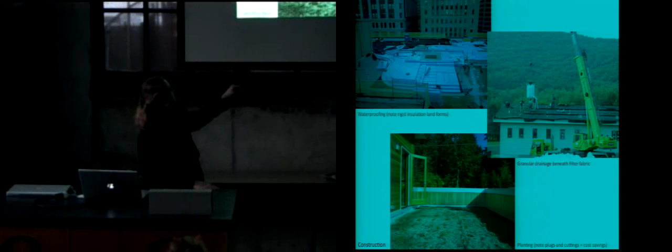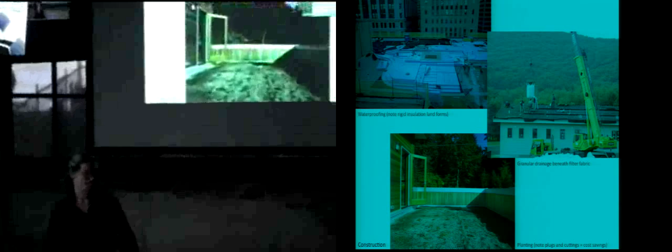So as you construct it, it's pretty standard construction method with the exception of that middle zone where they've got the big bag hoisted up and they're carefully, slowly spreading dirt over the roof of the Sugarloaf Wellness Center. They also have blower trucks, which they take the hose up to the roof and sort of spew this stuff around and you rake it into place. What you don't want to do is dump 3 cubic yards of dirt in one spot on a roof, because again, your structural engineer is not going to be excited.

Note the waterproofing layer, what should be orange, but is actually black. That should be bright orange Sarnafil waterproofing. But note on top of it the classic bright blue Dow styrofoam layers. Basically what they were trying to do there, and that's the Chicago City Hall green roof, they wanted to create topography on the roof. But they didn't need deep soil profiles. They didn't want to grow trees.

So the way you make topography on a green roof is through layers of styrofoam stacked up like that, and then you put 2 to 4 inches of growth medium over them. So you can get landforms on a green roof, but the way to do it isn't to pile dirt, it's to stack lightweight material underneath.

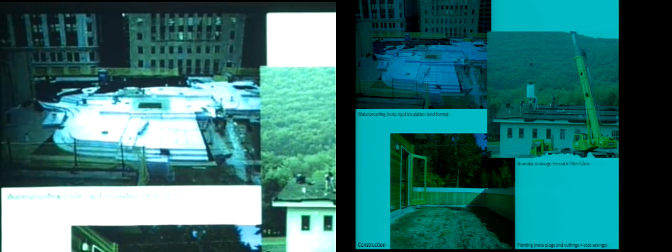So you do your waterproofing, your landforms if you want them, your drainage layer, dump the soil medium, and then we're bringing the plants. Typical intensive green roof, it's going to be shrubs, trees, grasses in gallon pots, kind of standard landscape installation plants. I always want to do it backwards. Extensive green roofs: if you're doing sedums, you can do plugs. I'll show you an image of those in a minute.

Actually, if I go back, that's Ed Snodgrass at the top of his farm in Maryland. He's written a book called Green Roof Plants. You can buy plugs, which is what he's tending there, and plant those by hand. Or they actually get a bunch of cuttings and you huck them out on the roof. And they're like the cockroaches of the plant world. 2 weeks later, they've made roots and they've perked up and they're quite happy.

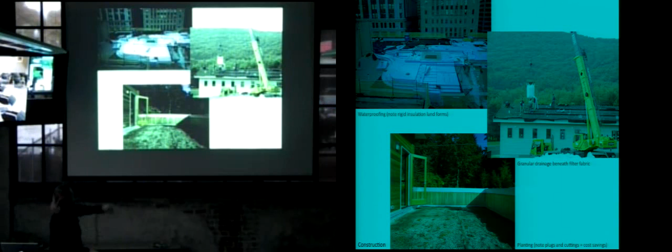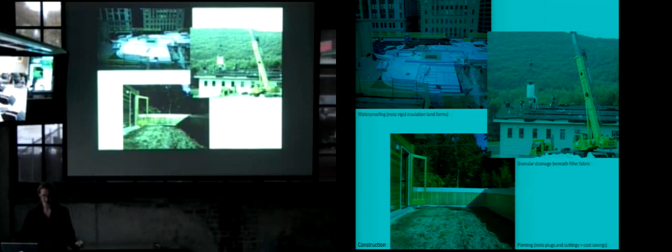And so this roof, you can barely see it in this projection, I apologize for the quality, but there's a grid of plugs which are going to give you a little more fill more quickly, but then the whole roof has been broadcast with tiny little cuttings, and in about 2 weeks they sort of perk up and get happy.

So that's the sort of quick and dirty, and I've attended 3-day seminars on getting to that point. So you got the really quick and dirty version of what goes into a green roof, how they get put together. Why would you do them?

It was great. I was working on my own house, and our bank said, we need a memo about the green roof. I said, yeah, sure, what do you want to know? And they said, well, what do you have to plant there? How heavy is the soil? Why do you want to do this? What's the point of a green roof? I was like, whoa, you just went from technical to ethical. Where are we going here?

And I thought, if I were putting a slate roof on my house, the bank wouldn't be calling me up saying, I need a memo telling you why you're doing this. So a lot of times you're asked, why are you doing this? You're doing it for a lot of reasons, and most of them have direct tie-in to money, which is what the bank wants to hear.

So improved roof life, because the roof has been protected from UV degradation, and you minimize thermal expansion and contraction, so the material holds up. In Germany, they found 3 times the expected life of the roof, or they've hit 3 times and they're still going. So they found really good life performance of especially EPDM and PVC roofs when they get protected with a green roof.

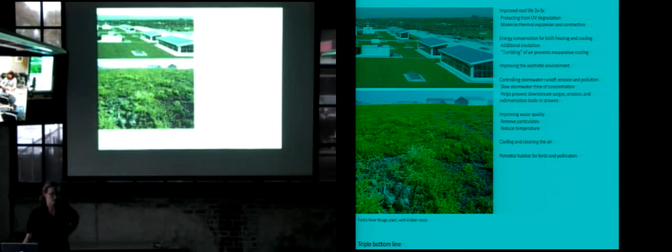This is Ford's River Rouge plant, which at the time when it was constructed was the largest green roof in the world. Something like 13 acres. It's huge. And what they've found is that there are now birds nesting on the roof of the F-150 pickup truck factory. Not bad. And Bill McDonough, who did that project, said when he worked on the GAP project, which also has green roofs, I want it to be like when a bird flies over, it's as though nothing ever got killed here. So thinking about the bird's eye view, literally.

This is a project that I worked on. It's Waterfront Square in Philadelphia. One of those funny cases where you're trying to balance your own ethics and aesthetics with the money of the client and the developer who has a very specific agenda. So all these pictures are of the green roof, and obviously it looks a lot like an urban square or park, which was the intention. It's all elevated 2 or 3 floors above the ground.

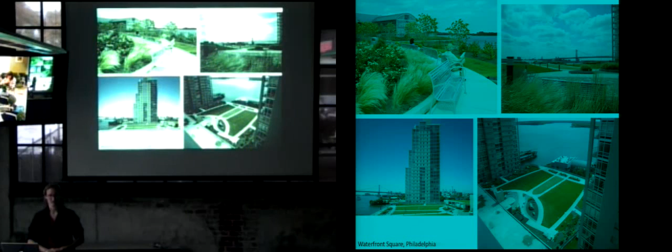This is an intensive green roof. It has pretty intense plantings. It has trees. It has grasses, shrubs. You can see in the image in the top left the kind of lush planting going on. You can see curves to help build up the planting depth where we need it, and then paving where we need lower profiles. This kid's playground and water fountain, and if you can believe it, and I can't, it has a putting green. My design.

But this helps explain the project a little bit. It's 6 high-rise towers in Philadelphia. Obviously, there's an intense parking need for that. Where do you put them? When you're adjacent to the river and you can't dig down, you put it in a raised parking garage. So that whole area around the middle is parking garage with green roof over it. It was a great first green roof because if it leaks, it's over cars, and it's not that big a deal. So as opposed to somebody's house or a museum.

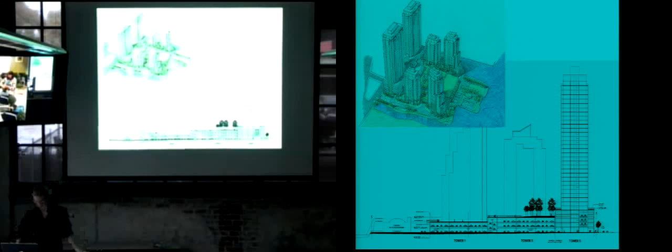And what you see is a much thicker profile here where we've got the trees, and then we get a little bit of topography as the soil profile tapers down to get to just a grass layer. That's a really quick and dirty green roofs.

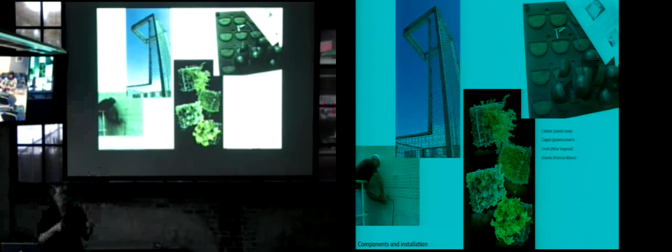Grids, the next one over, you can even buy these things pre-planted and just fasten them to your wall. It's pretty funky. And then sheets. This is a newer version of Patrick Blanc's system, so he now has still that thick building felt, but he has a sheet that goes in front of it with cups that actually hold the soil. So each one of those gets planted with a plant, and then there's your whole wall.

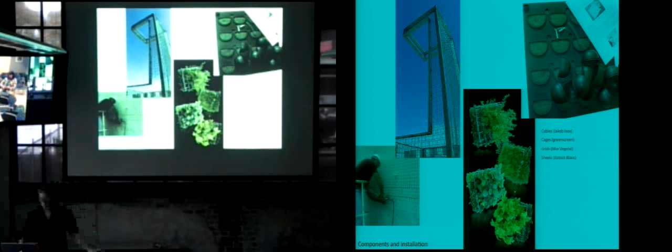Triple bottom line, a lot of the same benefits as green roofs. You get cooling and shading and evapotranspirative cooling. They can help thermally, with heat loads on a building by increasing the thermal mass and reducing air movement over the surface of the building.

They help with noise reduction. These are particularly good in urban settings. They help just sort of buffer from ambient noise. Obviously, there's an aesthetic improvement and, again, potential bird and pollinator habitat, depending on the plants you pick.

So again, bam, green walls in like 10 minutes. And to the more interesting or provocative aspect of it, why? So what? What can you do with them? Where do they go? I think there are a lot of people doing green roofs and green walls purely for ecological reasons, and I think that's great, and we should all be doing them. And if we do, it'll get the price down and make our cities healthier places.

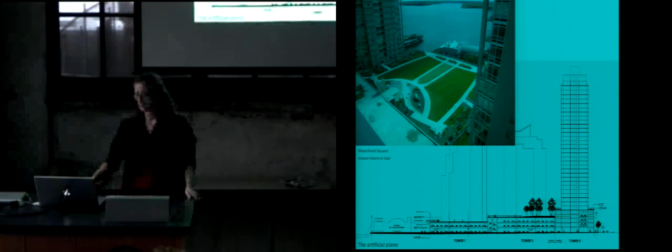So the notion of using plant material as your art medium is interesting and provocative, and asks some questions about what is art. And I assume you have more answers about that than I do. Questions about artificiality and what is real. In the end, because of the client and the demands of bank financing, this came out being a bit more expected. It was still fun to do a 2-acre green roof, but the original intention was to make a statement about the artificiality of the ground plane here.

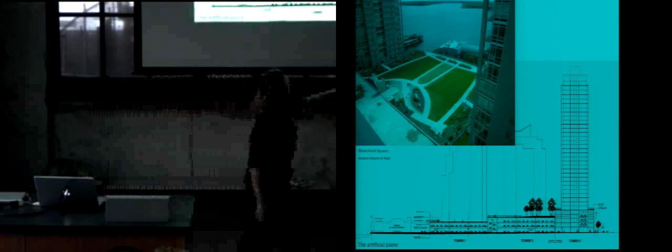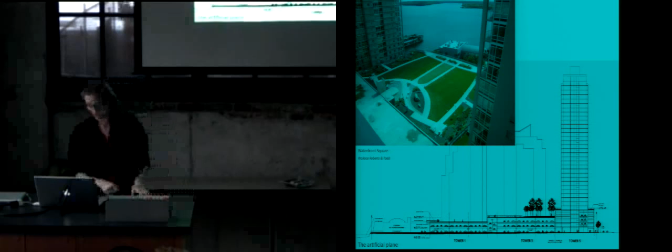So one of the things you see immediately with this section is the garage is made out of a pretty standard, cheap, quick construction technique, which is 60 foot long by 12 foot wide precast double T's, precast concrete, post-tension double T's. So you get this marking of the building in 60-foot dimensions, which is based on the size of the car. And that has implications for what you can put on top of the building. Where are the columns? Where are the structural loads transferred?

So one of the first things we wanted to do was make that underlying plane apparent. So the trees were located at the center points of the column. The third points of the double T's were left unstressed. So if you know structures, you know columns here, and you put trees right at the middle, you're more likely to break it, or you have to get a much bigger piece of structure because you've now loaded the middle instead of the ends. So this was meant to be a sort of gesture towards what lies beneath.

We also knew, going back to this view taken from one of the towers, that one of the primary uses of this plaza was going to be people looking down at it from their apartments or their condos. So we knew it was going to have a sort of graphic appearance. I thought it would be really fun to take the double T's and pull them apart a foot instead of having them butted right up to each other, and have a glass block strip between each double T. So during the day, when you're in the parking garage beneath, you get light coming in, and at night, the light of the parking garage marks the ground plane.

The developers didn't go with that. But I was trying to be provocative about the artificiality of this 12 by 60 module, over which there's now putting green, which, if you can't tell, kind of cheeses me. So the artificiality of green roof or green wall, it's a completely fake nature, which ties into this piece in the Zurich airport. I'm embarrassed to admit I don't know who the artist is on this, but the idea of the airport is something that transports people to international locations.

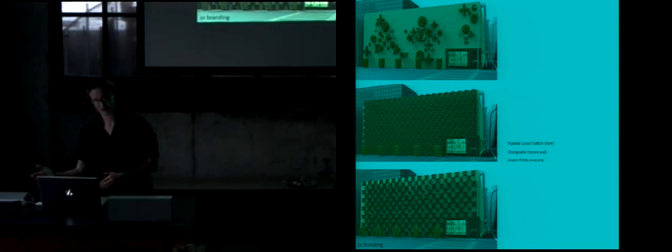And at what point does creating identity fade over to branding? I don't know. This is Topiade. Obviously, it's a Louis Vuitton store. Gregory Coletta and Sun Jang architects. And the idea is that there's a matrix on the building attached to what they call a very banal ugly building. And you have these little potted topiaries, and you can change it up seasonally. As with the window display, only it's the wall display. Kind of insane, and yet kind of wonderful.

And then nature in the service of retail. People like green stuff. I remember a building technology class at MIT where the professor was saying, what about concrete? You know, what's good, what's bad about concrete? What about steel? What about wood? And people were like, well, wood does this, wood does that. And I was like, anything else? I think that's the checklist from the textbook. He said, you forgot the most important one. People like wood. Hold it right, people. So people like plants.

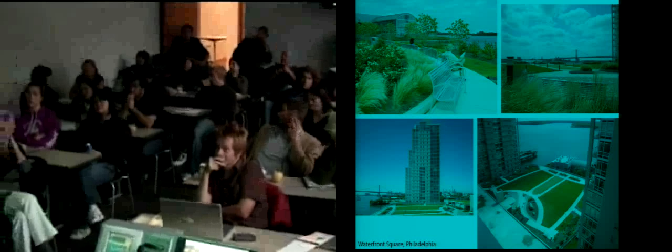On the project over the parking garage, was that largely grass that would actually be occupied? Besides the putting green, is it a grass roof that can be occupied, an intensive roof and therefore a lot deeper? A grass roof, a lawn roof, is actually kind of funny because it's somewhere between. You can do it in like 6 to 8 inches, so technically it's considered an extensive green roof, but if you plan to have people out there, it requires irrigation and mowing because grasses can't go through a drought. So this whole thing has an irrigation system underneath it, which again is crazy. I water my roof.

But the idea here is very much that in Philadelphia, there's a tradition of urban squares with high-rise towers around them. So this is very much in the tradition of Philadelphia development, but that's meant as a public amenity. I don't think they'd opened yet when they took this photograph, which is why you don't see anybody on the lawn, but it's meant as public amenity space.

And how much does the lawn weigh in comparison to like four cars? It's got to be a lot less. It's 6 pounds per inch of depth per square foot. So this was typically an 8-inch profile, so you can do that math, 48 pounds per square foot. And I think that's significantly under the dead load of a car. And then your structural engineer adds in the live load of people and dogs and whatnot. Snow in Philadelphia.